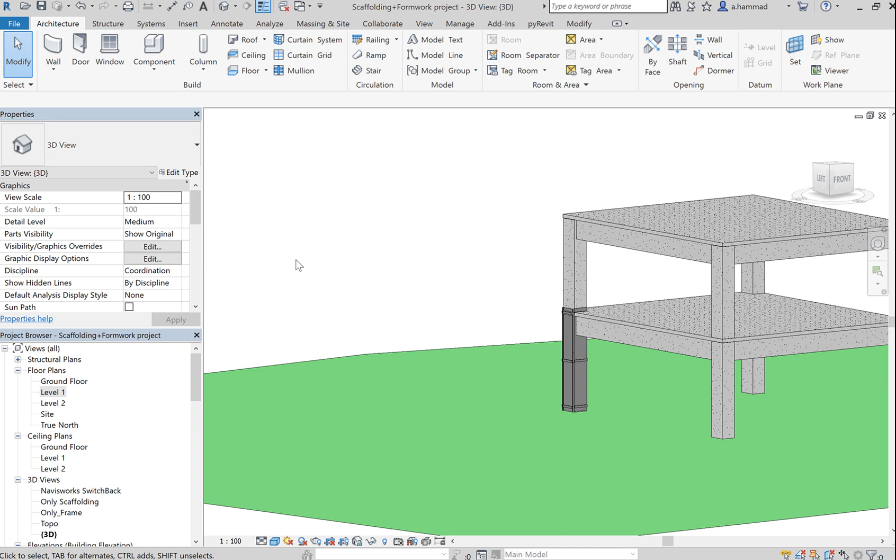So in this video we're going to continue on with placing our formwork elements for our columns. Now a situation that you guys might run into is one side of the formwork being shorter than the actual width of the column, and the reason for that is because if I click on my column you'll see that it's 600 by 750. So this side was actually... dimensions so that it was 650.

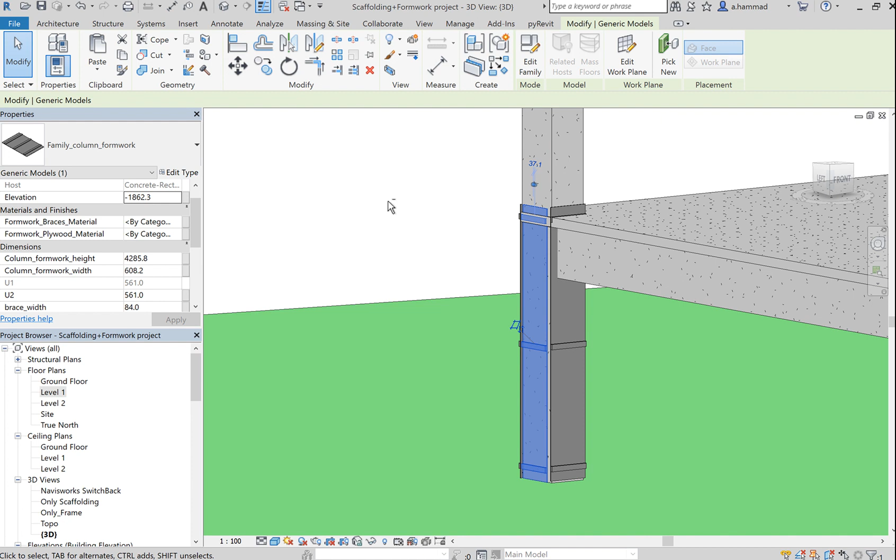But what about the other side? The other side should have been set to the width of the column from that end. So if we look at the column from this end, and you measure it using your ruler, of course. If you go to your elevation view, have a look at the distance from here to there, you'd find that this is 750 mil.

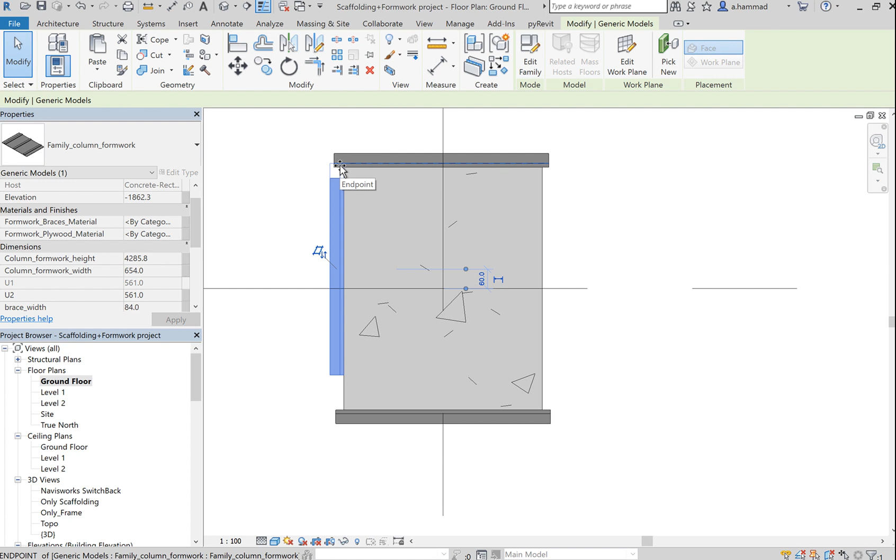Now, one way of dealing with that is if I go and click on my ground floor, and it's that column right here. So you can see from a plan view that it's short by this amount and that amount. So one way of dealing with that is to actually extend. So if I click on the formwork element, I'll see these two arrows pop up at either ends. I can just drag these up until you reach the other end, and then do the same for the opposite end.

And so now I've got all my column covered. If I look at it in 3D, you see that now it has all been covered.

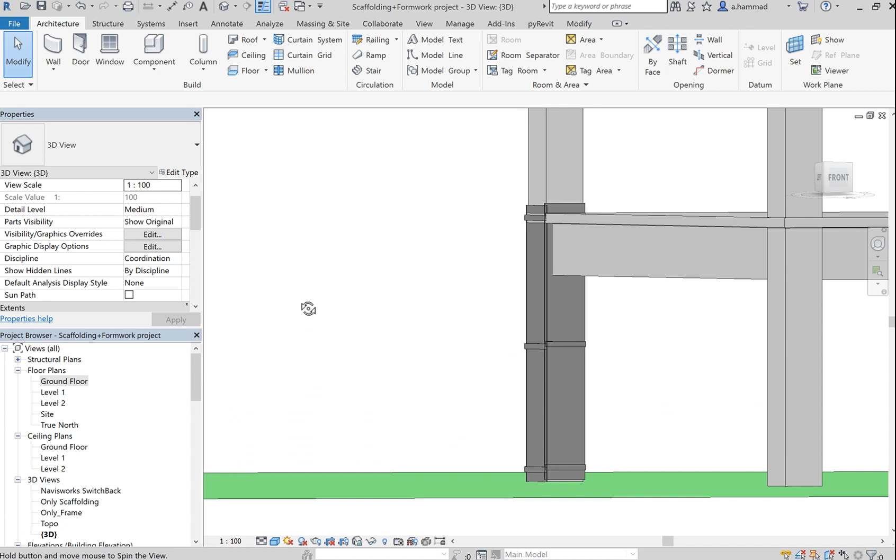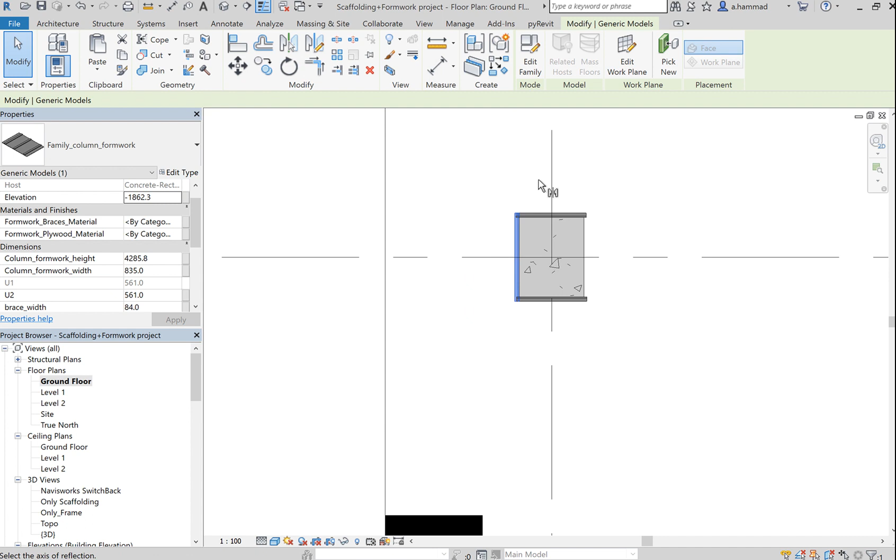Now the other thing that I want to show you is, if say I had these three formwork elements covering my column, I need to cover this part as well. So one easy way that I can do that is if I click on the element and then use this button right here. So mirror, pick axis. So click on that and choose this grid reference, and your object is going to be mirrored to the other part of your column.

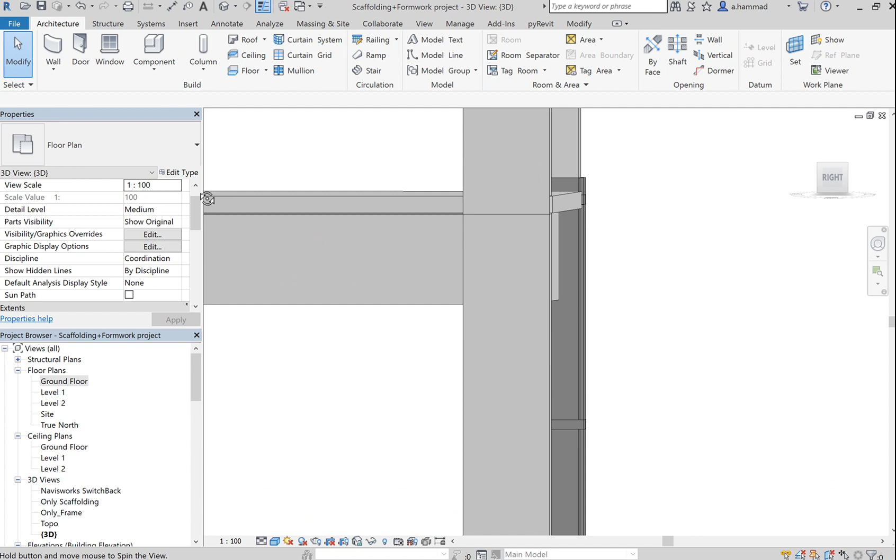Now if we double check, we go to our 3D view, and you'll see that if I rotate, it looks alright. Right, so I've got these braces, my noggins, if you like, what holds together my formwork element on the correct side. So it looks good.

The other trick that I want to show you is if I'd already done that for one column, but the others I still got to do the same, instead of repeating all this process over again, what I can do is if I've got a symmetric building, I could again use that mirror object thing. So let's say this. So what's this distance over here? So if we measure that distance, this is 9,000. Okay, so halfway through is gonna be 4,500, right?

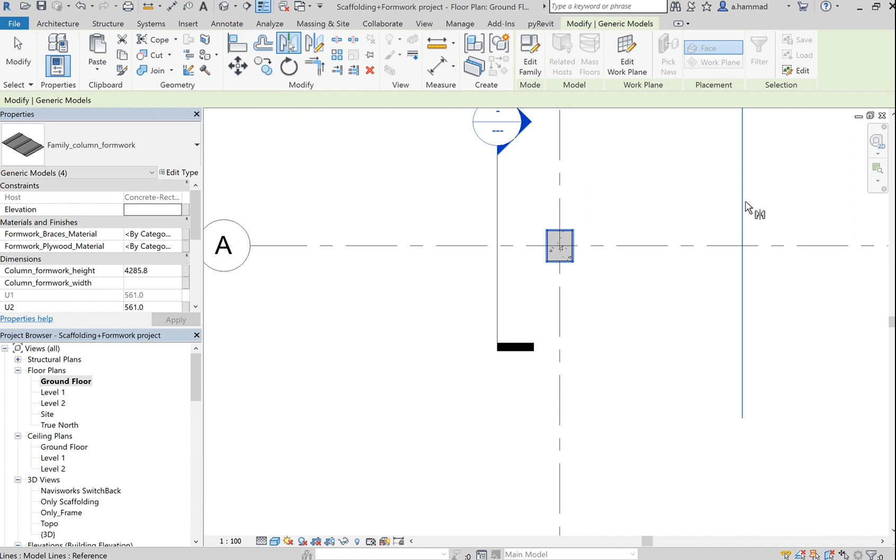So the way we do that is if we go to model line and just place a vertical line over here and specify its distance. So click on it, specify the distance, so that it's midway, 4,500. Now we can use this as the axis to mirror all these formwork objects. So again, click on these formwork objects, and then use this button. Click on your model line that you just created midway between both these, and you'll see now that it appears on the other end of this column.

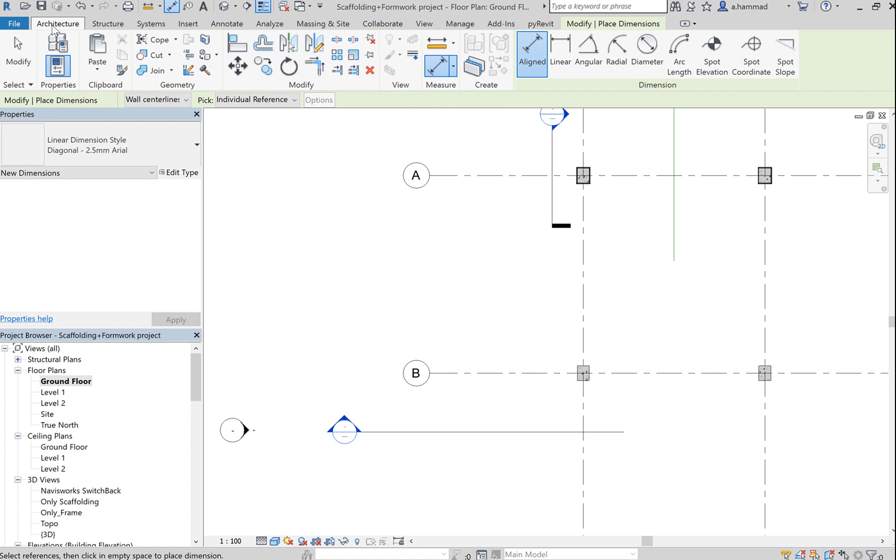We can of course do the same for these two. So again, measure the distance. So go over here, and let's see, that's 10,000, so that's 10 meters apart. Halfway through is 5,000, so we can go to architecture, select a model line, place a horizontal line now, and set this distance to 5,000.

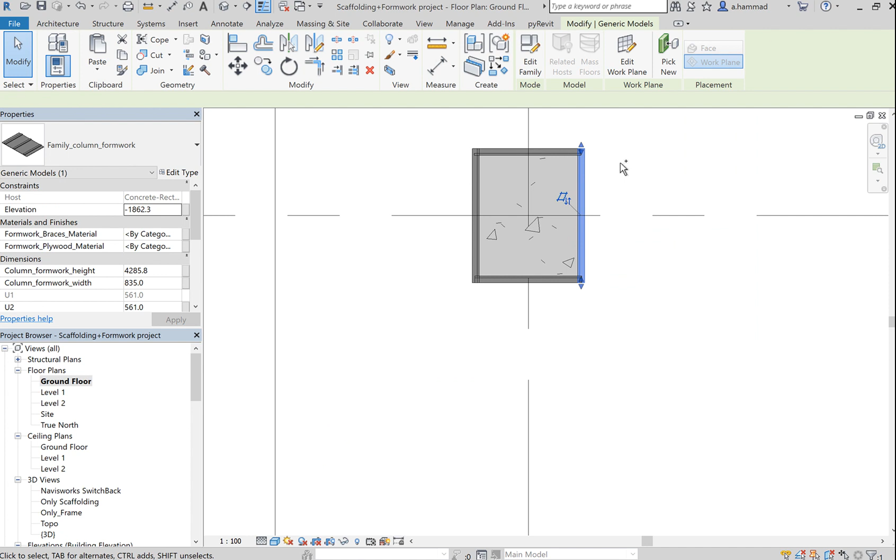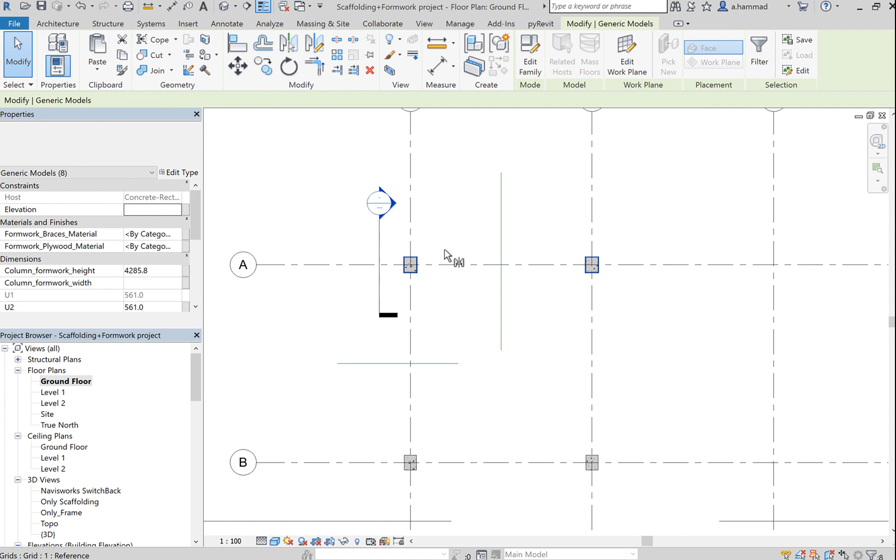And then we can select these objects. So make sure you hold your control button on your keyboard when you're selecting these multiple elements. I can also select the objects at the other end as well at the same time, so I'll do that, and then let's mirror them on that axis. So click on this, choose the axis, and then you'll see that these formwork objects appear on the other side of the building. Let's have a look at it in 3D. So you'll see now that I've got all my formwork for my level 1 correctly placed around my columns.